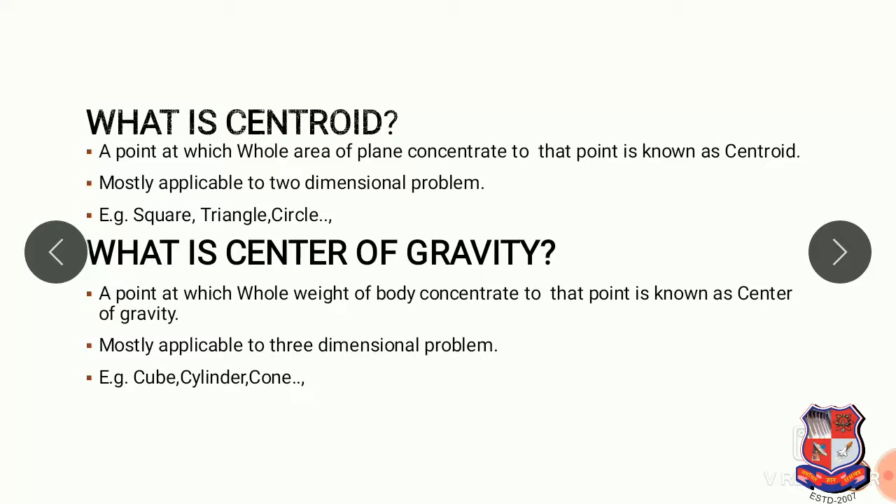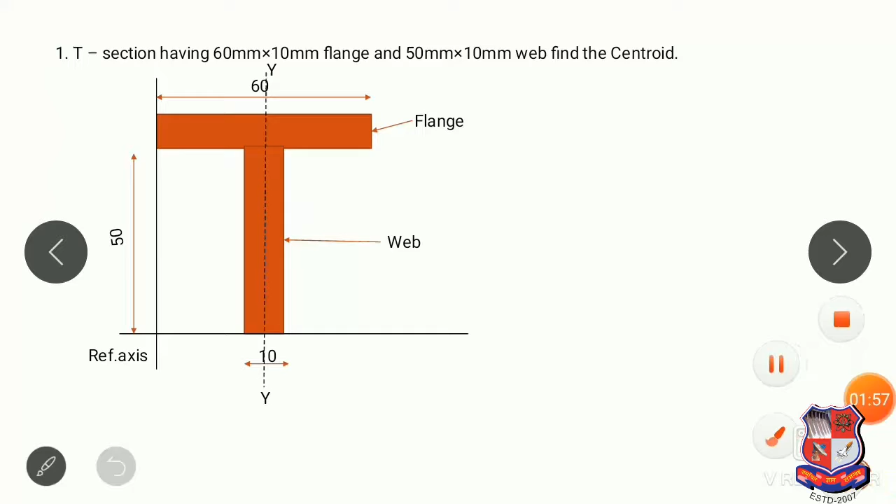So I am solving one example for better understanding of how to find the centroid for a given object. Here there is one lamina: a T section having a 60 mm into 10 mm flange and 50 mm into 10 mm web. Find the centroid. Finding the centroid of any given lamina is divided into 5 steps.

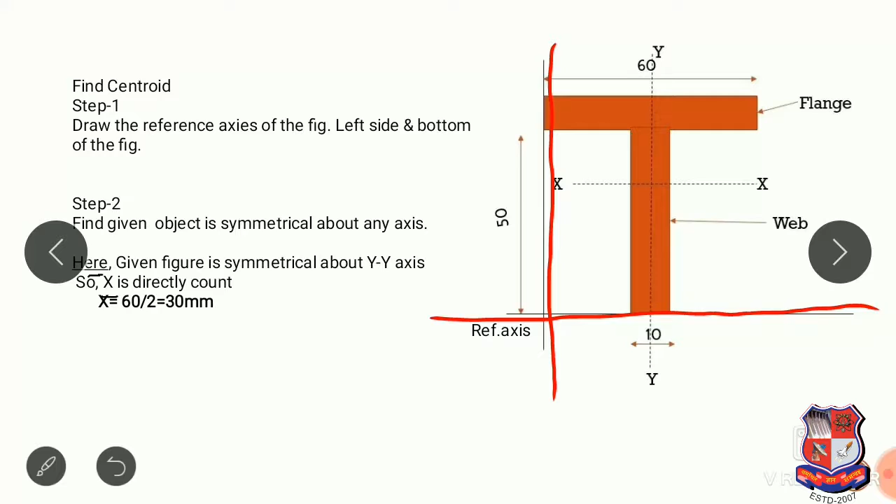Step 1. Draw the reference axis in the figure: the leftmost line and bottommost line. It is the reference axis. Now step 2. Find whether the given lamina is symmetric about any axis. But what is axis of symmetry? It is defined as an axis dividing the object into 2 similar parts.

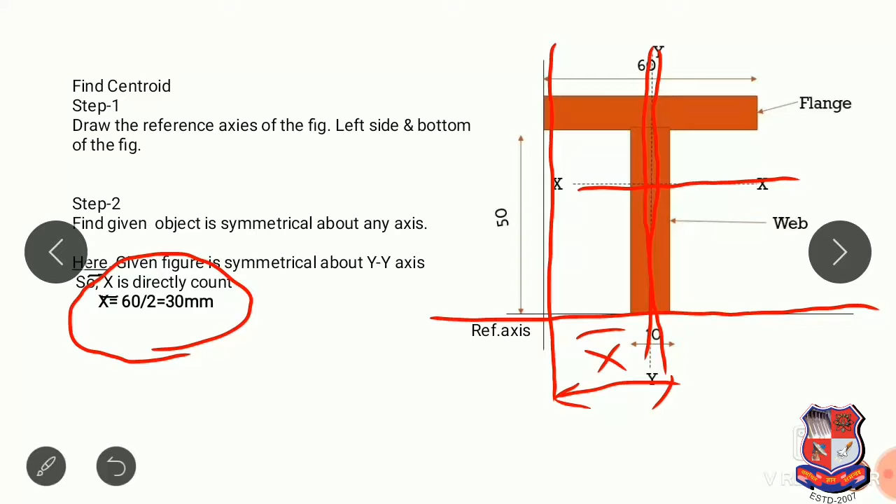Step 2. Here the given figure is symmetric about the y axis, so x bar is directly counted. Therefore x bar is equal to 60 by 2, which is 30 mm. Now step 3. Divide the object into different parts. Here the given object is divided into 2 rectangular parts.

Step 4. Find the area of the different parts. Also find the x and y components. Now here, part 1 and part 2. Part 1 is 60 into 10 mm and part 2 is 50 into 10 mm. Now area of part 1 is B into D, equal to 60 into 10, which is 600 mm square. Area of part 2 is B into D, equal to 10 into 50, which is 500 mm square.

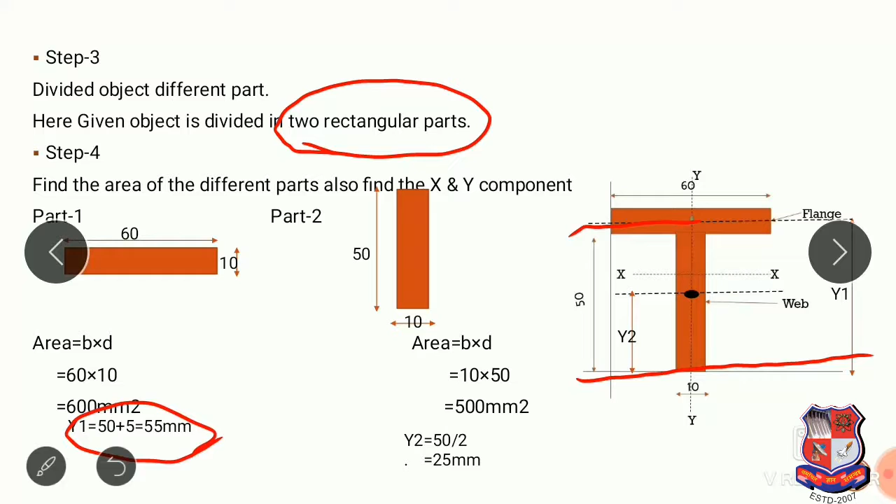Now find y1 and y2. How to find y1? It is the vertical distance from the horizontal reference line to the midpoint of the first part. Therefore y1 is equal to 50 plus 5, which is 55 mm. Similarly, y2 is the vertical distance from the horizontal reference line to the midpoint of the second part. Therefore y2 is equal to 50 by 2, which is 25 mm.

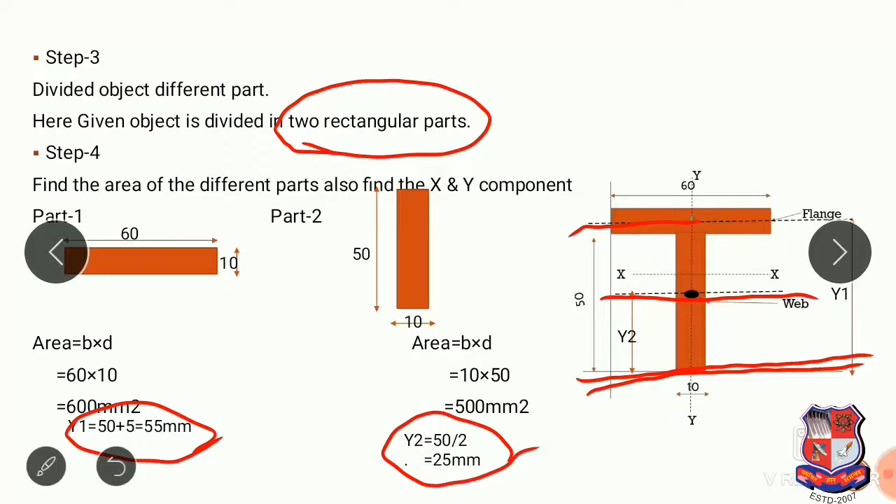Final step, find x bar and y bar from the equations. x bar is equal to a1 x1 plus a2 x2 divided by a1 plus a2, and y bar is equal to a1 y1 plus a2 y2 divided by a1 plus a2. Here we only find y bar because our lamina is symmetric about the y axis. Therefore x bar is 30 mm. So only find y bar.

Therefore y bar is equal to a1 y1 plus a2 y2 divided by a1 plus a2, which is 600 into 55 plus 500 into 25 divided by 600 plus 500, equal to 41.36 mm.